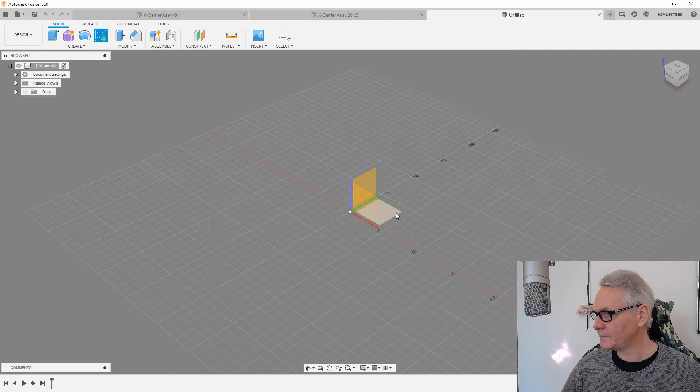So I'm just starting a new design in Fusion 360, and I'm gonna do a sketch on the top plane. We are gonna do a rectangle. This shape is just random, so it could be anything. It's gonna be a quick video. We're gonna do a center rectangle, let's do it 40-40.

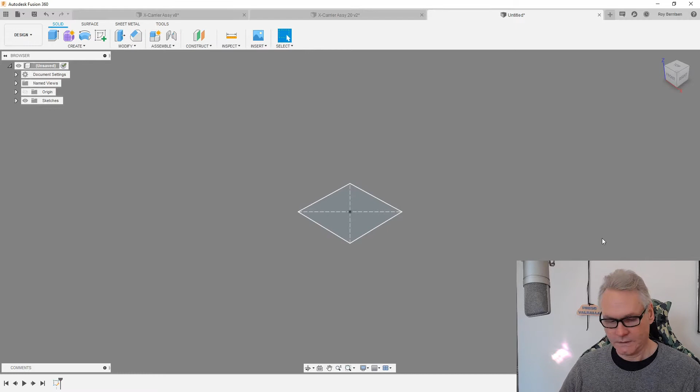Finish sketch. Do an extrude. Let's do it 45, we wanna taper it a little bit. All this is funny. I'm gonna do it 48 as well.

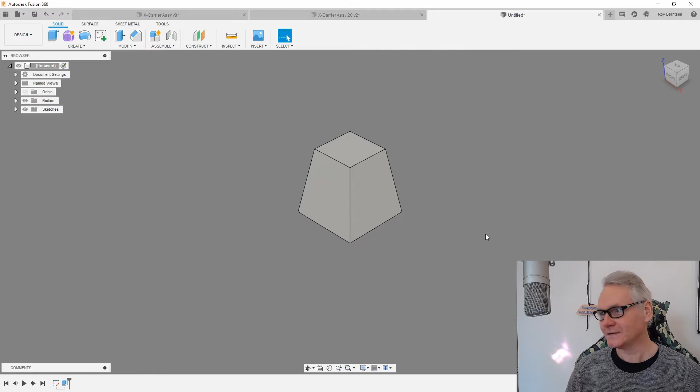New body, okay. I want this to be like a keyring or something. Actually, I made one for my dog, I'm gonna show you later. So it has bells inside, which I connect to his collar.

So I can hear him when we are going in the woods. We want a loop on the top here, and I want to draw on the mid plane. In our case, the front plane is the mid plane, and I want to slice it from the sketch palette. Just check mark slice, and I'm gonna go create, and we're gonna go project intersect.

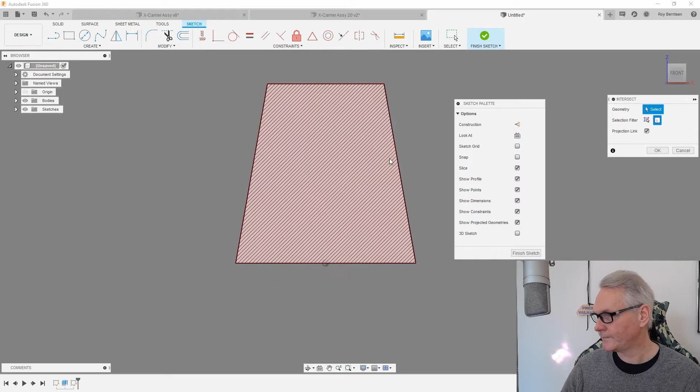I'm just gonna hit body, so then I have the intersect. As you can see, I want this to be support free.

Before I do the loop, I want to make a shell. First I want to do some chamfers, I don't like these sharp edges. 3mm, let's see how it looks with 4. Yeah, it could be okay.

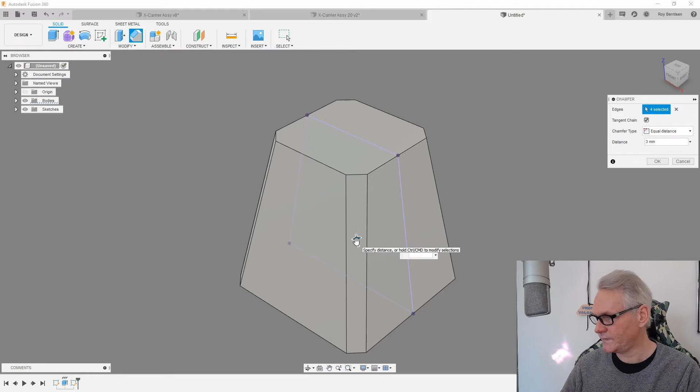4mm, and then I'm gonna go... Actually I'm gonna go in my timeline now and move this chamfer so it's before the sketch. I'm gonna edit this chamfer, so just double click, and I'm gonna also grab these guys.

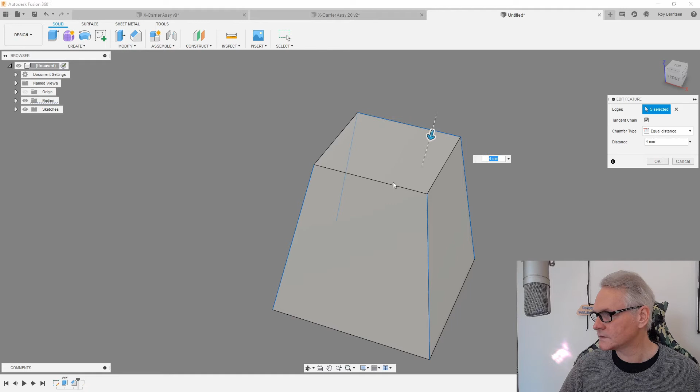This is more what I want. Our shape for this, it could be anything, but yeah, I want it to be easy to print. So going back to my sketch again, and slice.

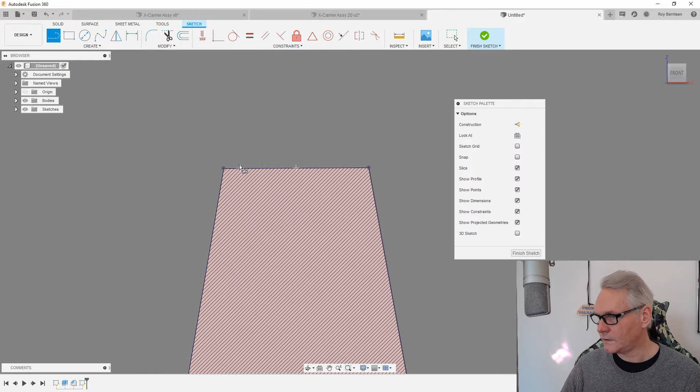And then I'm just gonna do line from here to here, it could be a rectangle as well. Yeah, something like this, a center line. So I'm just gonna snap here and just go up and do midpoint constraint between this point and that line.

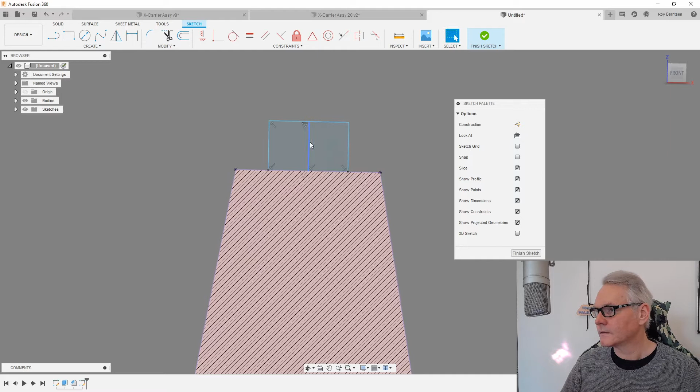Then we are going to make that line a construction line, and we can also do some measurements on that line. So let's do it maybe 12, we can look at that later. And I want some distance here, let's say 2mm. I can now see I want it higher as well, maybe 15.

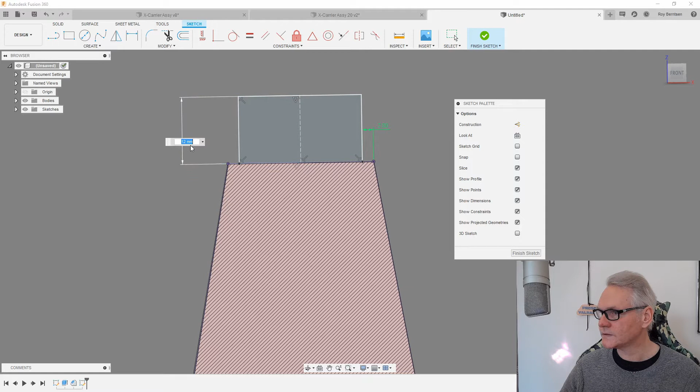Let's try that. So we need a profile because I'm gonna sweep this guy. So make a drawing here. Just go P for project and hit the plane and do OK. Actually, I want to project these points as well.

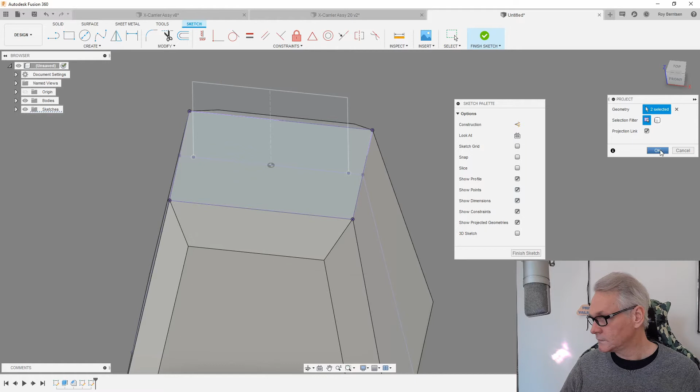So go and have a look from the top plane. I'm going to do a rectangle. I want it to be a center rectangle, so from the sketch palette, just hit the center rectangle. And I want it to be 4x4, I think it should be okay. I don't think we need a second profile, but let's just do it, it doesn't hurt. It's gonna be 4x4.

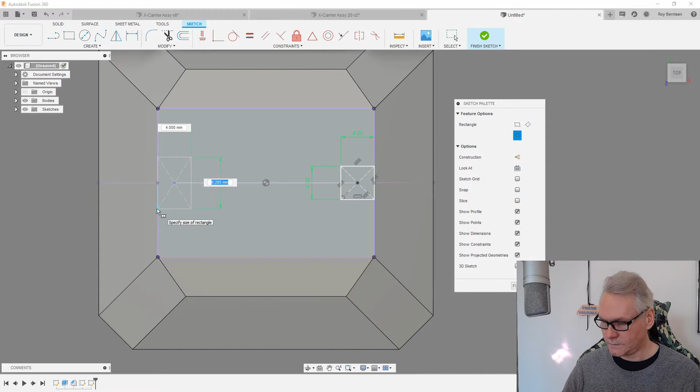Finish sketch. Then we're gonna do a sweep. So from the create panel, we are going to find sweep. We are going to select our profile, or profiles in this case, and the path should be this line.

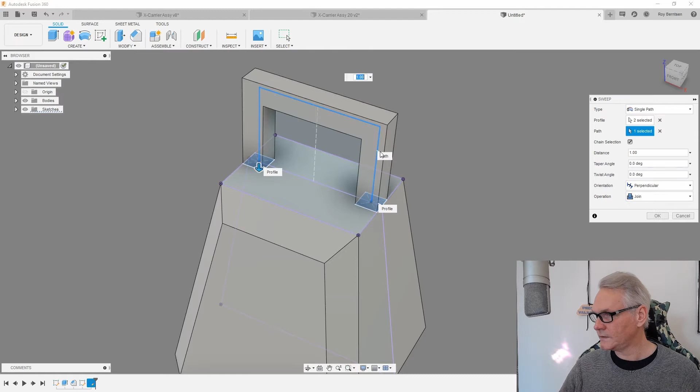And we have join going on. Now we did actually forget something because we need to shell this thing. Let me just go back in the timeline. Maybe we should even do that before our sketches. So go to modify and shell and just hit some edge on this guy.

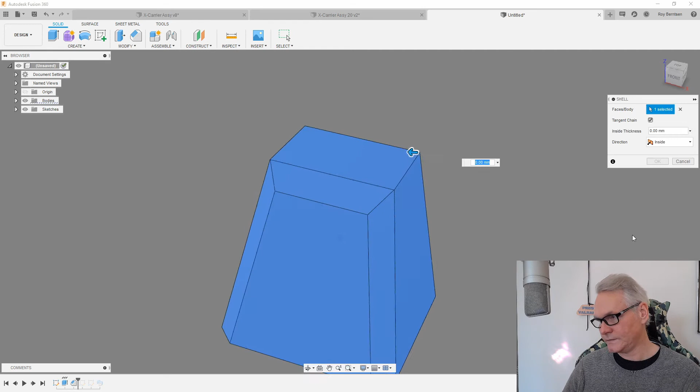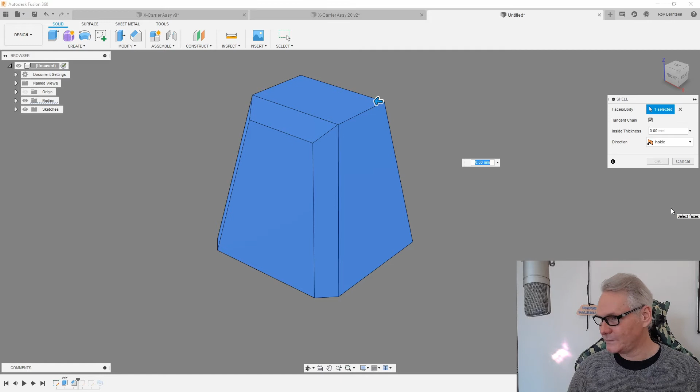It depends on what you want to use this for. It could be like a gift surprise thing where you hide a ring inside or something, and then you want it really thin so you can open it, and then you can give away like a keyring, but it's really a diamond or something. But let me do 1 millimeter for this object, and then we can have a look inside.

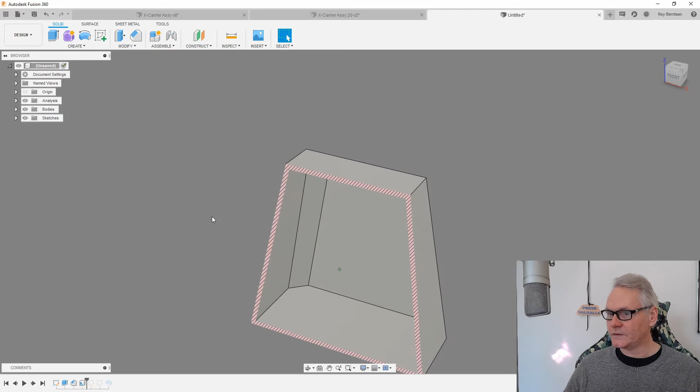Inspect section, and we need to pick a plane. So this is how it looks like inside. And this is now support free because we can bridge this part, or else it would not be possible to do this. So we need the top plane to be horizontal.

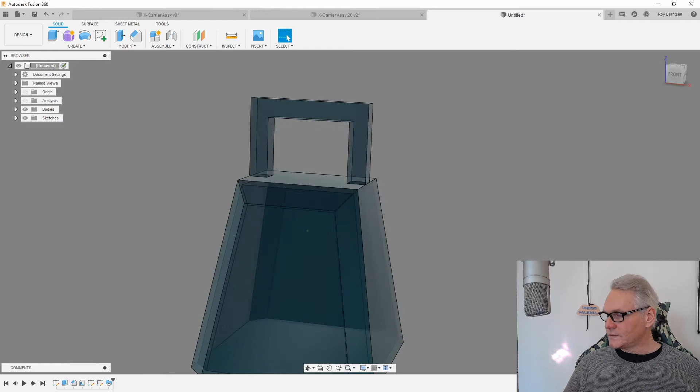Okay, so this part is solid, this is shell. And we can do A for appearance, glass texture on it, just to have a better look inside. See how things are. I also want to do some chamfers here.

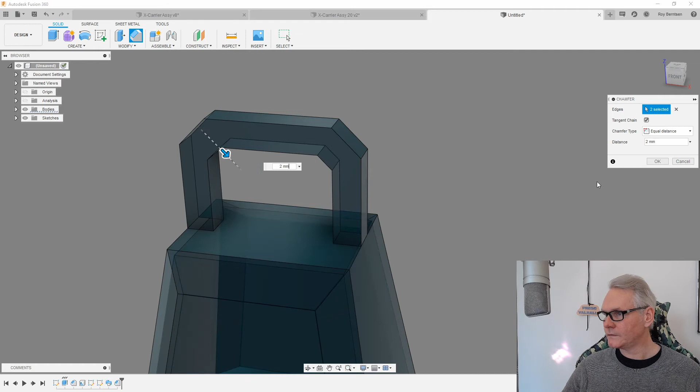Maybe 4. Again, chamfer on this edge and that edge, or maybe 2. 2 millimeter on the inside here. So now we have like a keyring.

It's actually done. I don't know how long time that took, but not very long. So let's go to tools and make, print. I'm just gonna save it.

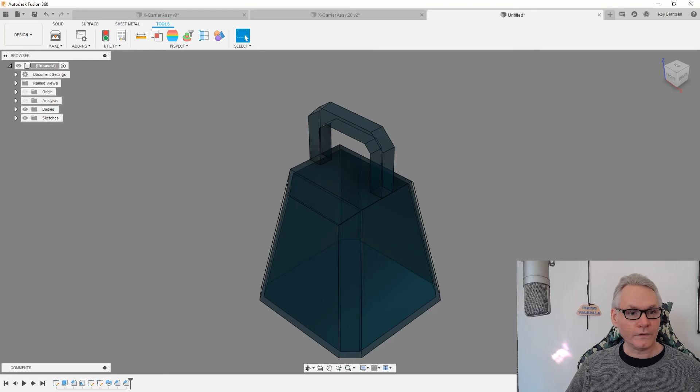And let's go to Cura. So in Cura, choose whatever material. Open the dome or whatever you want to call it. Actually, I want to push my line width now to 0.5 because the walls are 1 millimeter thick.

So let's just slice it and see. I want to go wall line count. I'm gonna want to go 3, I think.

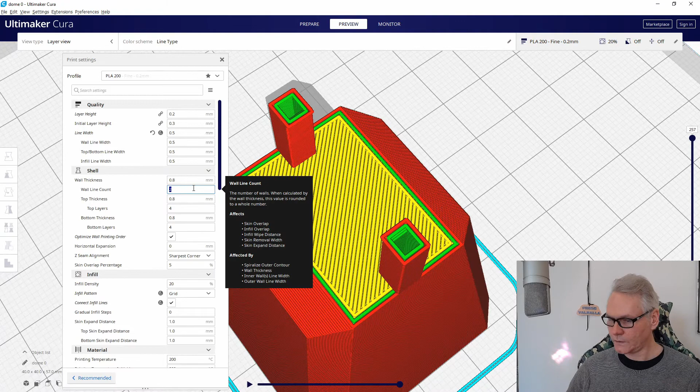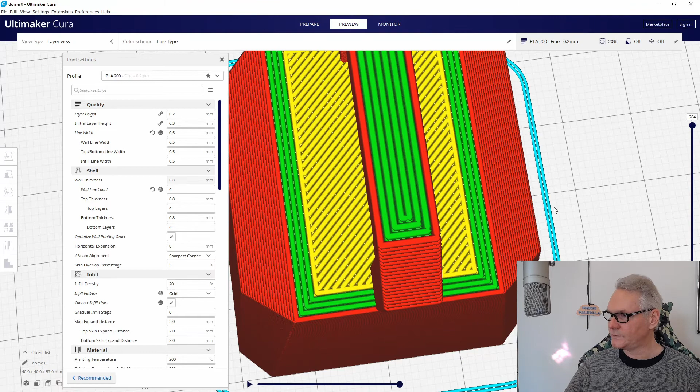So this looks okay. I would like this part to be more dense. It doesn't seem to grab any infill. Not sure why. So let's push the wall line count to 4. Yeah, that's more it. So I want that part to be a little bit more solid. I think I'm happy with that.

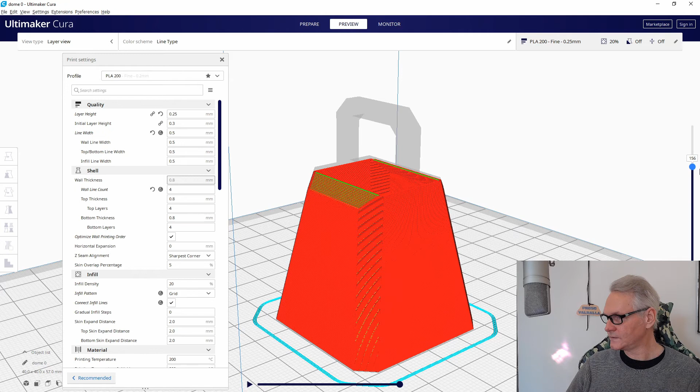I want to push my layer height to 0.25. I just want this to be a quick print. 33 minutes it says. 4 top layers is of course 1 millimeter, so that's what we want. So it's all dense at the top here, no infill, and the same at the bottom. It should be good. We're just gonna print it.

There it is, on its way. You are going to see me in a couple of seconds, which is about half an hour for me. Stay tuned. I'm gonna print a little bit, and then I'm gonna drop in the bells.

And then we have a bell, which I'm gonna place on the collar of Lucky, my dog. So these are the bells. So I just need the walls to be a little bit higher before I drop them in.

So we have reached 15 in Z height, so I'm just gonna pause. Then we're gonna drop in the bells. So yeah, seems like we need to go higher to place the next one.

So we are at 24 millimeter in Z height. I'm gonna have a look, pausing, see if we can drop it in. That seems good. Just gonna resume doing the top. Will be interesting to see if this works.

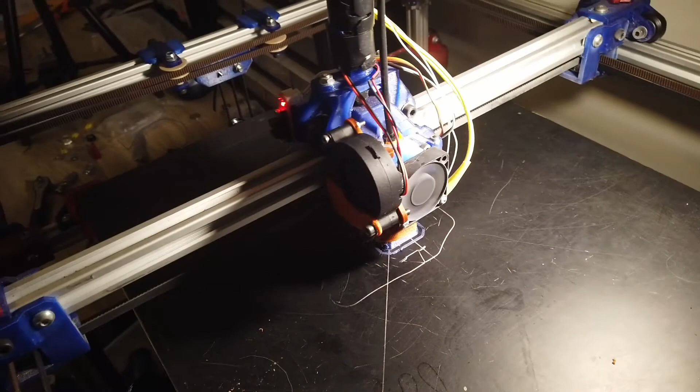So the dome is finished. We have some stringing going on. This was printed with a 0.8 nozzle. It's a little bit rough, doesn't matter really. Let's let it cool down and see if it works.

Lucky he's wondering what's going on. We got some bells now. So I have to try it tonight and see if he can walk around with it or not.

Fun project. You can really hide anything. Just a small project I wanted to show you guys.